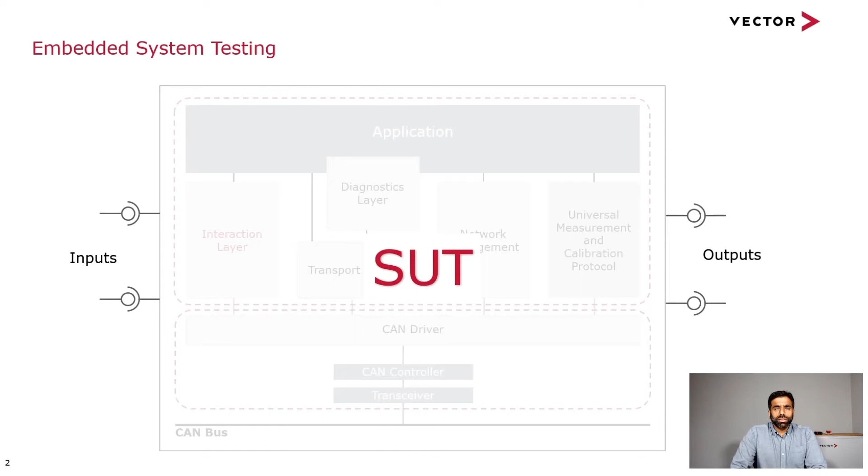Now, purely for understanding and analysis point of view, I have divided all the development right up until now, and into the future, into 3 different phases.

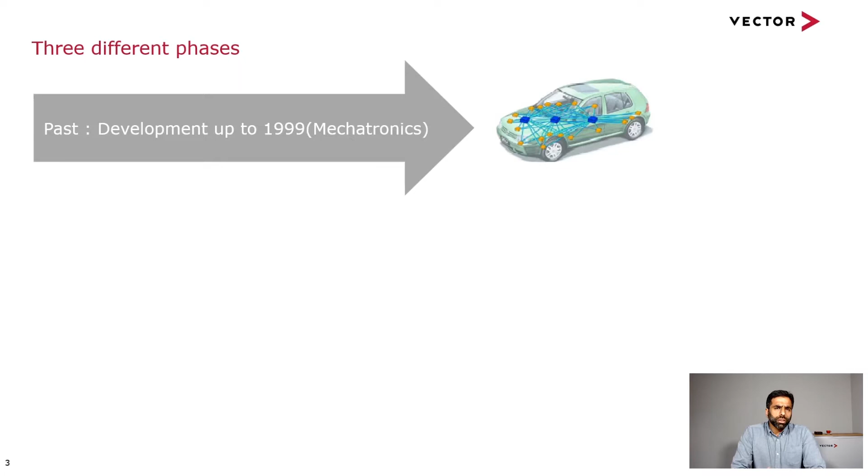First phase, running up to '99, I've classed as the mechatronic phase, where the emphasis was more on the mechanical, on the physical parts. We started to see some communication protocol making its way into the car.

The second phase runs from 2000 up until now, 20 years. Here the focus shifted towards more electrical and electronic systems. Importance or emphasis on the electronic and electrical systems increased, and that's where we started to see many more communication protocols making their way into the car.

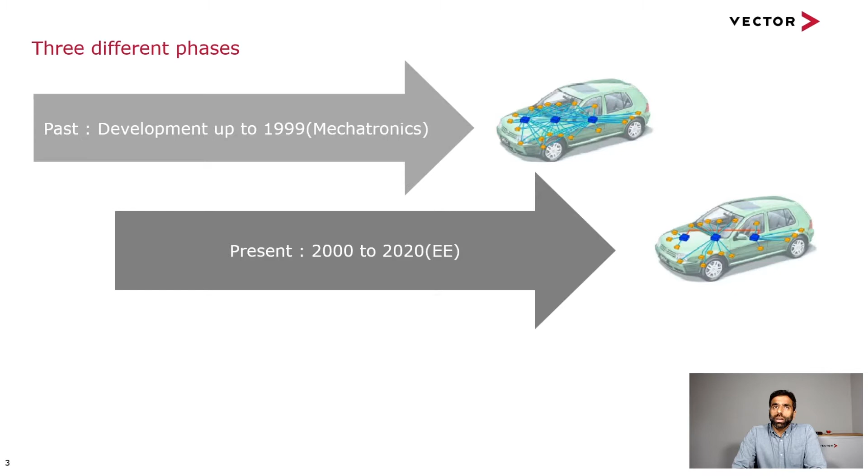And then the future is all about the software. Future is all about artificial intelligence, and that's where we would see completely autonomous vehicles in the future.

I've seen announcements by one of the leading German auto manufacturers that level 3 autonomous cars would become available around this time, as well as Tesla owner Elon Musk making an announcement that level 5 autonomous cars would become available even this year, which I think is quite ambitious, but we'll see how it pans out.

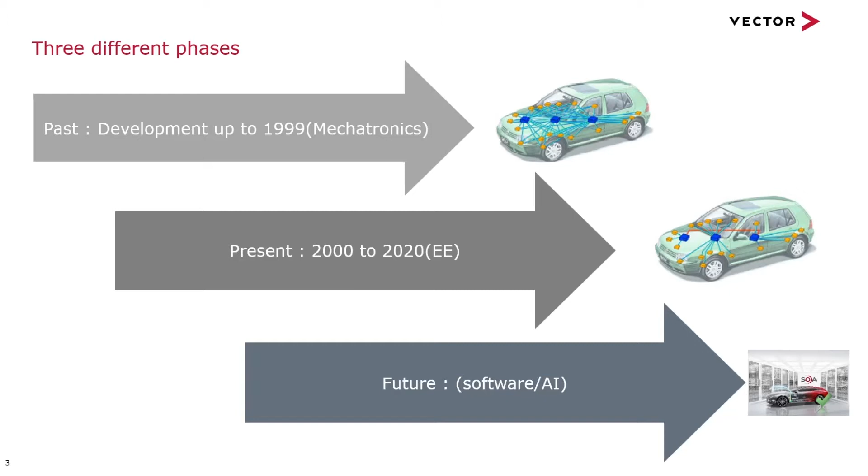Now, let's discuss this mechatronic phase in a bit more detail. This is the phase where we started to see these electronic systems making their way into the car.

If we look in a bit more detail, these are the core functions which would keep the car going: on the powertrain side, the engine control units, ABS, transmission; and on the body electronic side, body control module, door module, and seat modules were developed and introduced into the car.

This is the era when we shifted from point-to-point connections to introducing first a communication protocol, CAN bus. CAN bus was introduced in the early 90s into cars, and towards the end of the 90s, more and more manufacturers started to introduce CAN bus into cars.

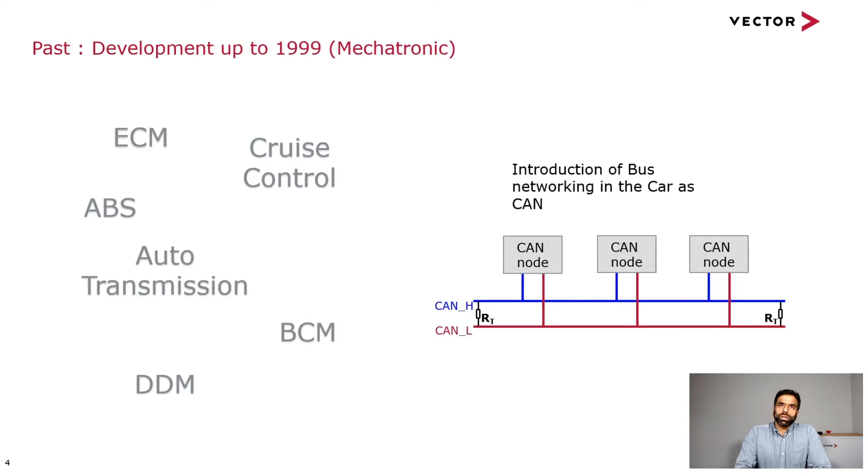Now, looking at it from the testing point of view, this was the time when car manufacturers were still positioned as mechanical companies, so getting the physical mechanical parts right was the big focus.

This is a typical example of a test setup where, if you are testing a seat, door, even steering column or lighting, you would have this kind of setup with sensors, actuators, and data acquisition, as well as CAN inputs or other analog digital inputs to the ECU. So the ECU would be there, obviously, but the focus wouldn't be on this electronic control unit. Rather, the focus would be getting the physical endurance test as well as life cycle test done.

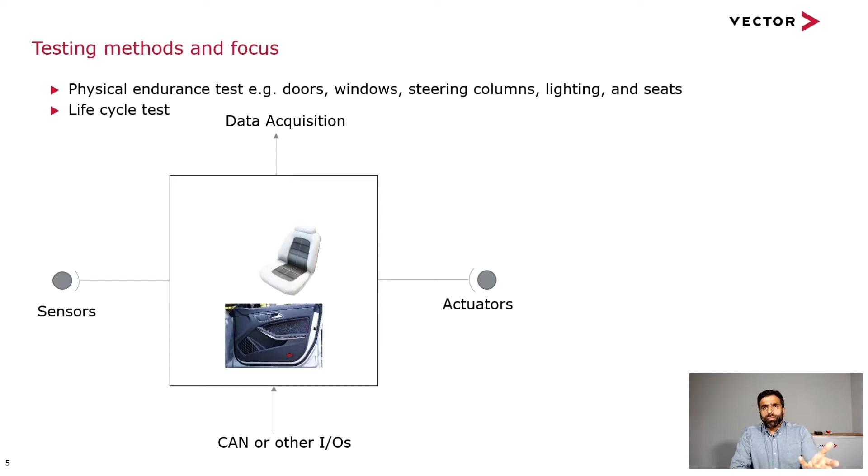As well as this type of test, we probably saw EMC testing done, to make sure that the stereo or radio you're using, your signals are not getting affected. As well as other types of testing which were in focus, making sure that the car would function okay in hot or cold climate.

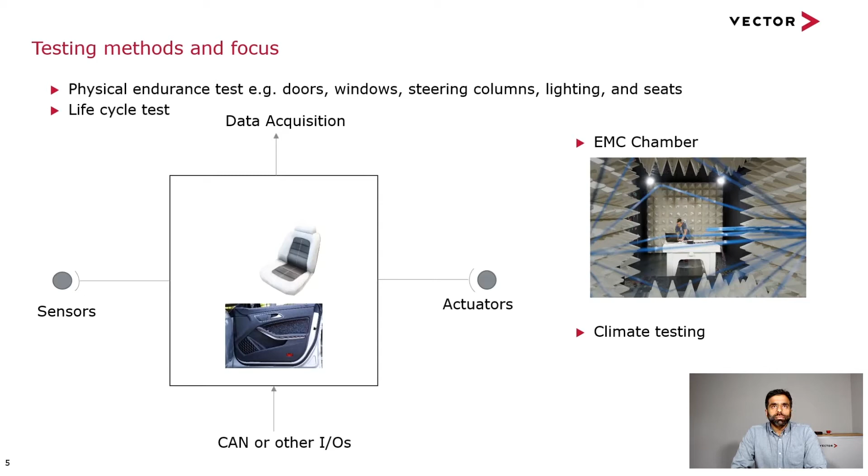Then there was a paradigm shift as we moved into the 2000s, running up to 2020 now. Here the focus shifted more onto the electronic systems. So getting the electronic system right started to increase, as well as advancements in the powertrain electronics. The systems which were introduced previously, as well as the body electronic systems, we started to see more and more functions linked to comfort and convenience appearing.

Now all of these systems, with a lot of software and electronics, pushed for more bandwidth, and that's why we started to see a lot of other communication protocols appearing within the car. So we saw FlexRay, we saw MOST, we saw many more CAN buses introduced within the car, as well as LIN. LIN was there to address the low bandwidth requirements where CAN was deemed too expensive.

Now, from the testing methods point of view, we saw the focus on MIL, SIL, and HIL, which we will discuss now. One of the testing techniques that was in focus was getting more and more automation and reusability of the tests to achieve higher efficiency. We have seen a lot of automation, or more automation, within companies, but we could of course do with more automation.

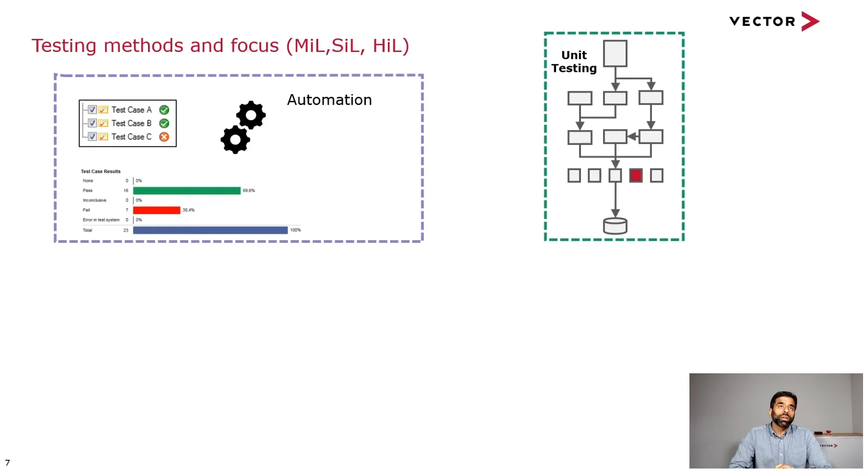Then comes the actual shift in software development. Previously you would hand code the software in embedded C, but we started to see more and more software developed with modeling. So you would model the software, and since with this technique the model was available as a byproduct, people started to use this model for testing purposes. So the technique that appeared was MIL, model in loop.

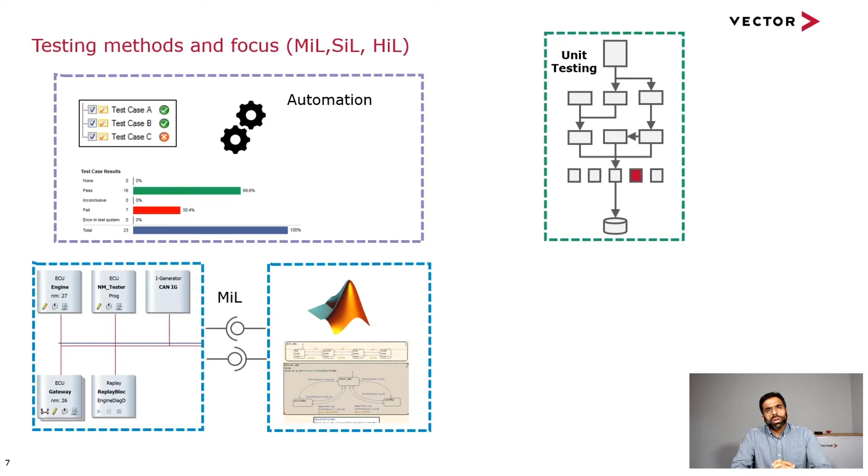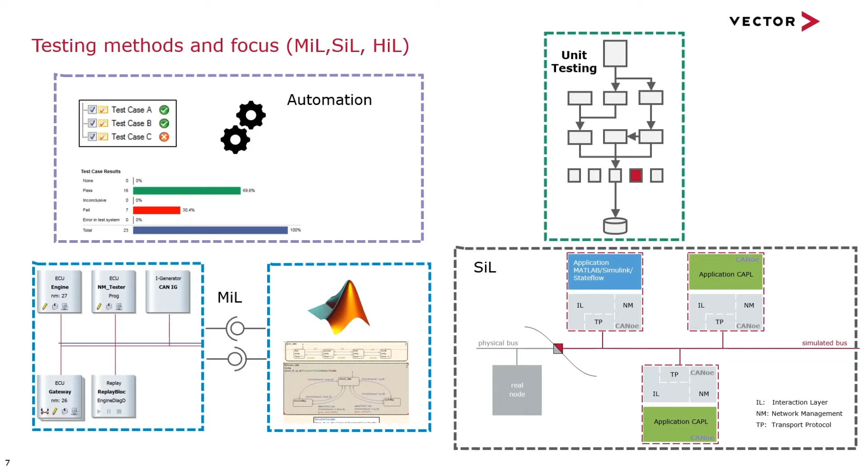Once the model is ready, you could take this model into the virtual environment and start testing. The second step would be that you generate the code from this model, and then repeat the same test on this software — that would be called SIL, software in loop. The third step, obviously, would be that once that software, together with the embedded software, is deployed on the actual hardware, that is our system under test — the actual system which is going to get into the car.

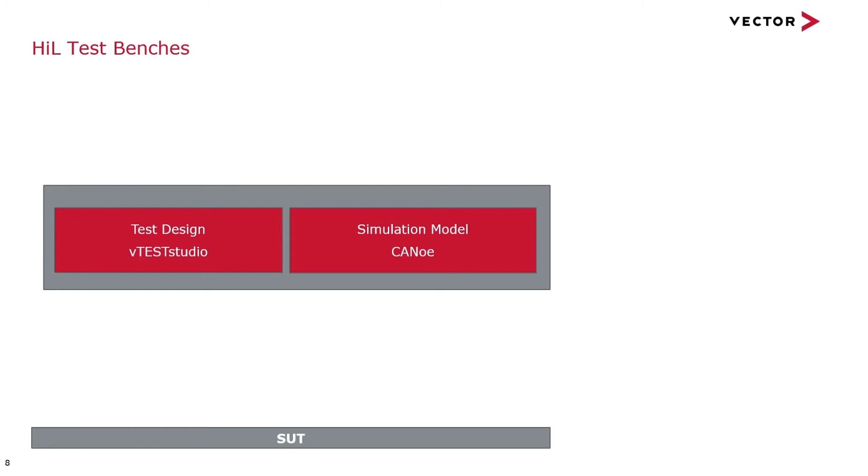So testing that in a controlled fashion is where we have the HIL test bench. Here, for example, I'll show you how a typical HIL test bench would look. You would have a typical control software with a complete residual bus simulation setup. You would design your test cases within vTESTstudio, and then interface with the environment modeling software and the physical modeling software, so you have a complete virtual environment to carry out this testing.

The system under test would then be connected to the HIL setup, connecting to the inputs and outputs of the system, and controlling this system under test with whichever bus systems it is using. So you would utilize that type of interface to connect and control the system under test.

Another important step we saw was managing all of this process — test management became very important: managing the test requirements, running the tests, and getting the results. Getting complete traceability of the test results and linking them to the actual test cases, and then linking the test cases to the actual test requirements, has become very beneficial, and people started to see a lot of value in managing the whole test process this way.

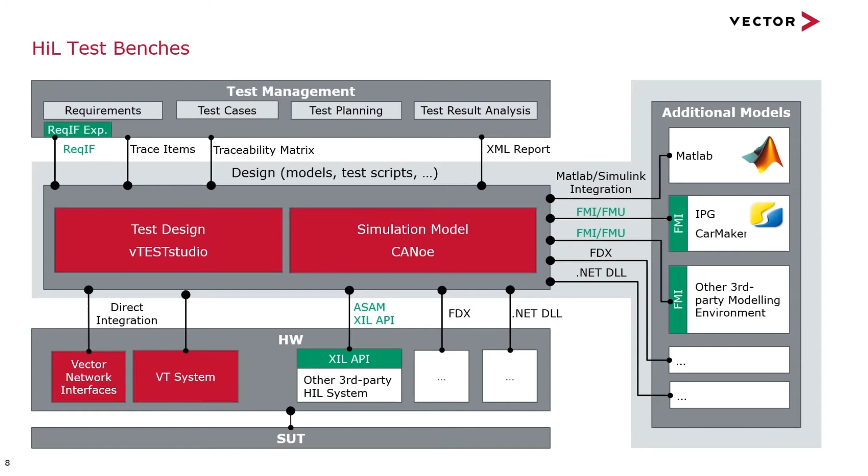Then another aspect I wanted to address separately was Ethernet. Ethernet has started to make its way into the car, and we started to see more and more Ethernet development from 2012 onwards.

If we look at the OSI model here, the base two layers, PHY and MAC layer, this is what we would call the automotive Ethernet. We have two physical layers, 100 Base-T1 and 1000 Base-T1, already in development, and about 3 or 4 other different physical layers going through standardization. So within Ethernet we already have more physical layers to deal with than all the physical layers we've come across combined from other communication protocols. This brings many more challenges in testing those physical layers and getting them right to be deployed within the car.

Then obviously we are getting used to the whole TCP/IP concept, and getting this right is also very important. Then the actual application layer protocols, which are more automotive specific, such as SOME/IP and DoIP, and then the applications which would be more time sensitive would utilize the TSN functionality.

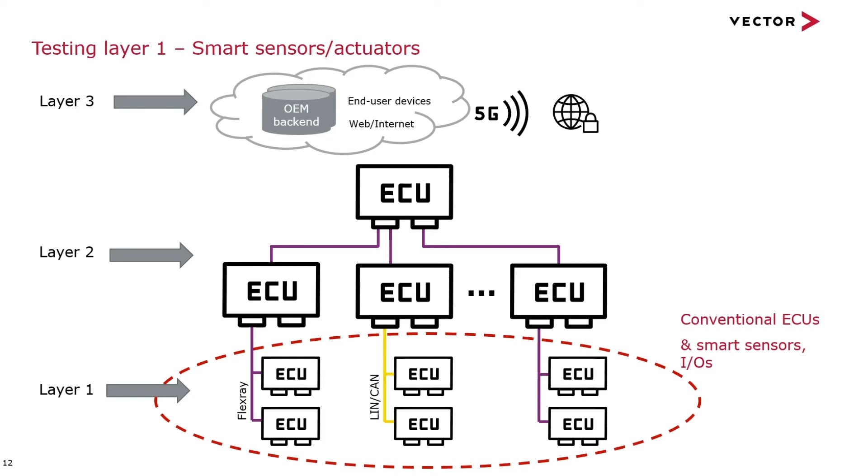Now, from the testing point of view, taking into account these three layers and how we address testing: the base layer, layer 1, consists of the conventional ECUs, the smart sensors and actuators. We would test these probably the same way we've been testing embedded systems, utilizing MiL, SiL, and HiL setups.

The challenge would be for the middle layer, layer 2, where we're testing the domain controllers and central computing units. Here we have the challenge of dealing with highly complex ADAS functions, meaning a huge amount of test scenarios to deal with, as well as a figure of about 100 million kilometers or miles of testing needed for autonomous cars to become accepted. That's a huge number, and if we think of doing this test mileage on the road, that would be almost impossible. So we'll have to think of how we can virtualize it, part done virtually within the test environment, and part on the road in the car.

As well as integration of these several applications, as I mentioned, here we are dealing with service-oriented architecture, which gives us the flexibility to host more applications. So we have to think of how we can test any application once it is deployed, how well it would work within that environment, as well as making use of continuous integration and server testing. Those are the new techniques you'll have to get used to.